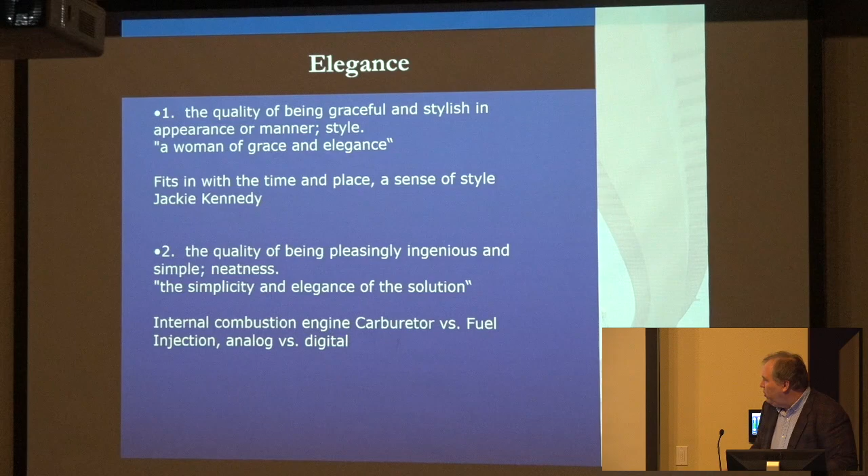That's why, of course, it exists now. We have a lot of computers and whatnot to run our cars, and it couldn't really exist back in the 20s, for instance, when they were looking for a way to mix fuel with the air in your system.

Bridge engineering. We're here to talk, and we'll use bridges as most of our examples today. This original talk was written to be presented to some bridge engineers to help inspire them and go forward. So some of that's going to creep in at this point, and I'm sure at a few times it probably doesn't fit exactly with what everyone does here, but we'll talk about it some anyway.

People build buildings, houses, courthouses, city hall, prisons, barns, you name it. Heavy civil, these are like water tanks, things along those lines. Roads, freeways, paths, highways, streets. We push dirt around quite a bit to try and make things work.

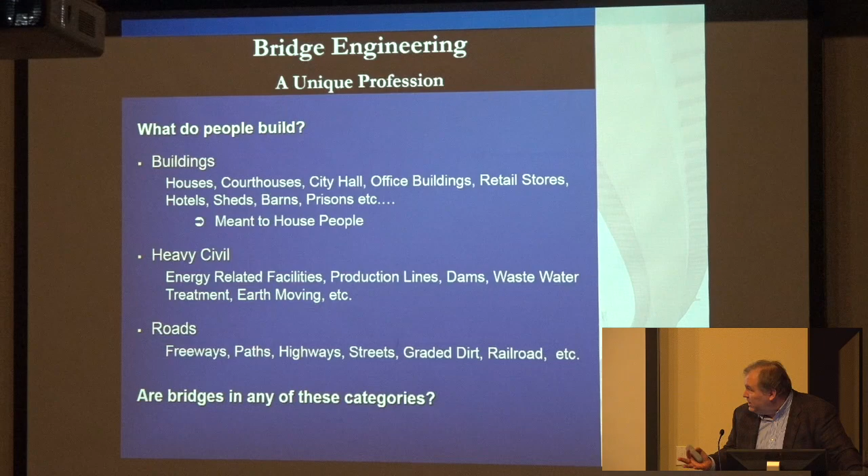And of course, are bridges any of these? I say no, they really aren't. Bridges are fairly unique in their form. They gather pieces and parts of all those. Obviously, in our case, highway bridges, they have a road going across them, so they're a little bit like a road. But they're kind of like a building too, in that they have structure, foundations, columns, beams, and things along those lines.

They are built very differently than roads. Roads are pushed dirt up, and then we pave them with asphalt, whereas a bridge is a structure that we build and then complete with a deck on top of it. It's very different from a building as well. Buildings have walls, shear walls, and other things in them, whereas a bridge really doesn't—it's columns supporting a deck up above it. They're really a very unique piece of work.

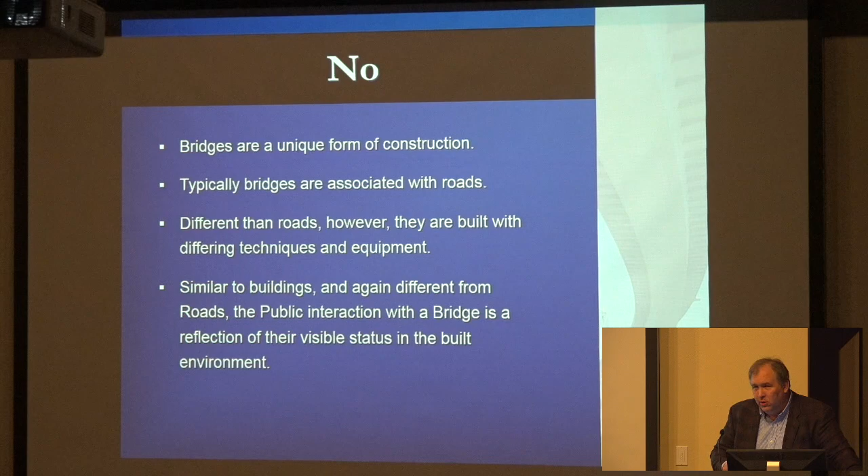One of the things that also makes them, I think, unique is that from a public structure standpoint, they have a very, very strong effect on any location where they're constructed, whether it be rural or in a city or things along those lines.

So I think it's a privilege to be a bridge designer. The expertise to design a bridge is unique. We have our own codes and whatnot that we follow.

To get a little bit misty-eyed or whatever, I guess you'd call it, bridges are the cathedral of the modern age. The reason I come to that statement is in medieval times, when you think of those great European cathedrals, the church was the economy. The church existed, and they employed people to build these big cathedrals, which is what they wanted. That was really a big part of what kept the flow of money going at that time. Governments were very haphazard, really didn't even exist in a lot of cases. But it was the church that really helped keep that economy rolling through some of the dark ages, the Middle Ages and whatnot.

I think bridges serve much of the same purpose at this day and age. They provide an economic engine for our society. A few years ago, we went through what was called the Oregon Transportation Investment Act number 3—there was 1, 2, and 3, and actually all were driven to the same sort of thing, although 3, I think, was the pinnacle. It was a large bonding fund that the state put out to get us through much of a downturn in the economy, pumped a lot of money into a lot of hands, and really helped keep the economy of Oregon moving when it was having some difficulties outside of the public sector.

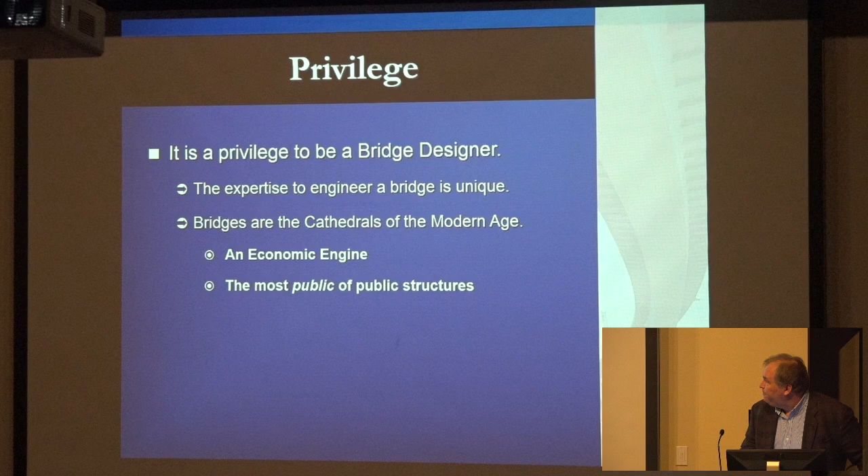Bridges still serve some of that purpose to this day.

So, aesthetics: a particular theory or concept of beauty or art, a particular taste or approach to what is pleasing to the senses, especially sight, although I think sound comes into play here some too, maybe not smell so much, certainly not taste.

Vitruvius wrote De Architectura, 10 volumes dedicated to Caesar Augustus. This is our first book that is any extensive work on architecture and what architecture means. He wrote it to Caesar Augustus, as in his glory, if you will. Vitruvius was essentially the second man in charge of Rome at that time, and he was Caesar's architect. He was his builder, his engineer, in charge of roads and bridges, and did a great job. He was really the very first guy who sat down and thought about just what it means to build things.

He defined 3 basic requirements of construction: utility or commodity, durability or firmness, and beauty or delight. So utility, durability, and beauty, he picked as the 3 things that you need to deliver in any kind of construction. Those are the 3 important things.

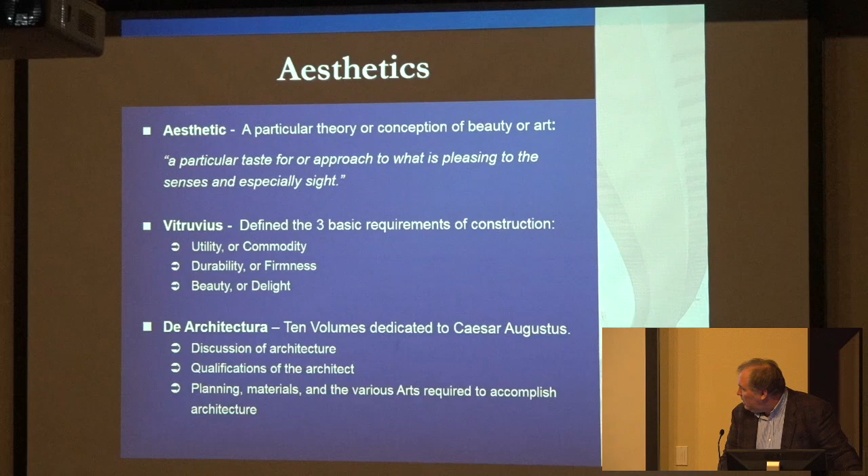So utility and durability — these are pretty easy to define, or at least imagine. Utility is whether the structure does what it's supposed to do. From the standpoint of highway bridges: does it provide a deck for us to drive our car from this side of the river to the other? Does it carry the pipe we want to carry? Does it deliver that piece of work for us?

Durability, of course, goes towards age — will it stay together? Concrete and steel are all very solid and give us great durability. Wood is actually a wonderful material, a little less durable, but we've still got plenty of wood bridges around. In fact, I've got a contract now that I'm just finishing up, or starting on, to replace a wood bridge out in Lincoln County that I'm looking forward to doing.

Right now, our code generally says that bridges should last 75 years. We generally like to think, particularly for our more major ones, that they'll go somewhat longer than that, and certainly they do — we've got a number reaching or exceeding 100 years old in the state now. In fact, we've got a few that date back to the 19th century, but not very many. Our real first push of building in the state was right around the 1920s, so we're getting right into that range now.

So beauty, our third thing that we need to have — what the heck is that? Of course, that's in the eye of the beholder to a large extent. But for us as engineers and designers, we kind of need to put a little bit more definition to that, because some of us engineers don't have particularly great eyes. Maybe some do, some better than others.

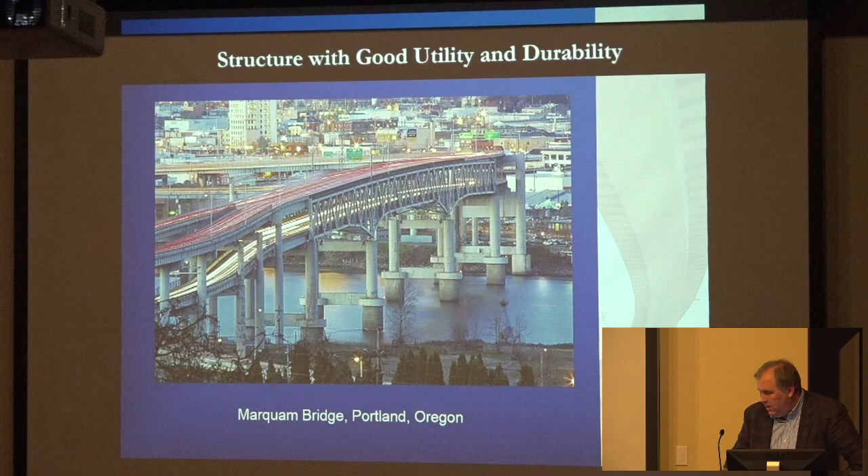I happen to think it's not a bad structure. It's certainly not beautiful by any great stretch, but it's certainly not a total eyesore, at least not in my mind. But when it was constructed, it resulted in some backlash from the Portland community. They didn't think this was quite the visual they wanted in the city, and really wanted to see something more in the next structure that went up.

And shortly thereafter, just a few years later, the Fremont Bridge was constructed, which is essentially the exact same bridge - 8 lanes of traffic, 4 on the top, 4 on the bottom. It goes across the Willamette River, about the same length, but certainly very different from a visual aspect, and quite a bit more attractive. This was the longest tied arch span in the world when it went up, so it was a very significant structure, and still is to this day.

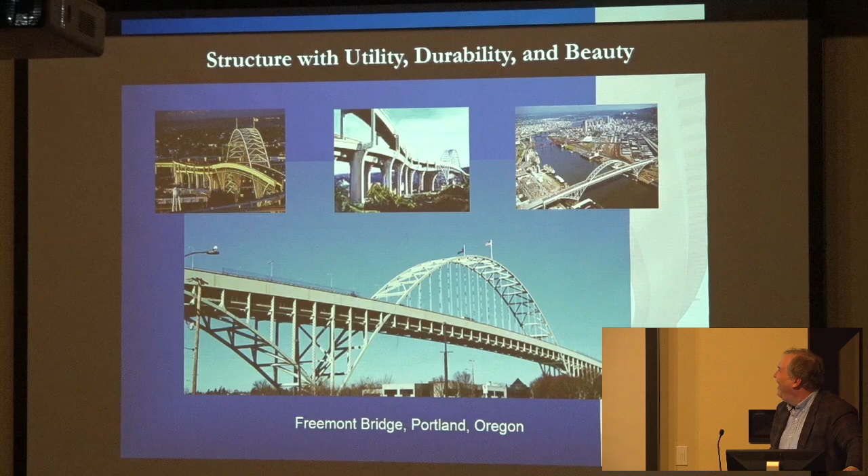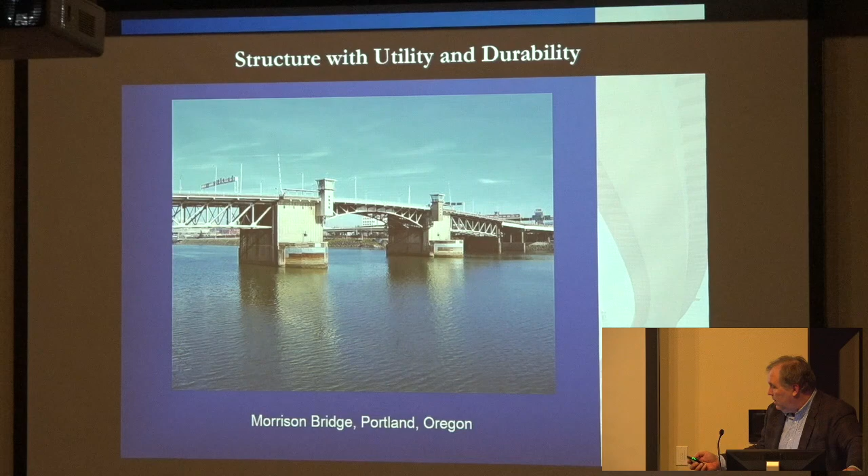And again, not unlike the Marquam and the Fremont, we have another example just downriver that really is essentially the exact same bridge, going over the same river. This structure was designed by the Lindenthal firm out of New York. Gustav Lindenthal did this bridge, the Ross Island Bridge, and the old Sellwood Bridge, all 3 of them at the same time for Multnomah County, designed them all as one package.

And generally speaking, just a little bit more satisfying form. The railing is more attractive, and it's just really a much more pleasing and inviting structure, I think.

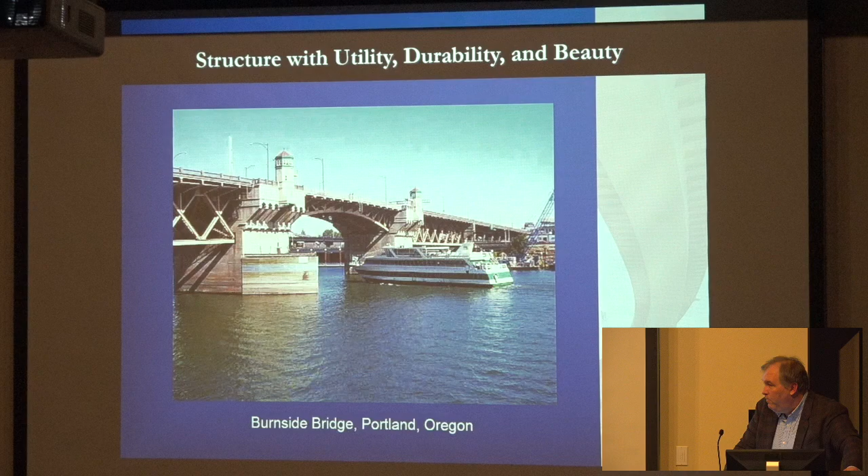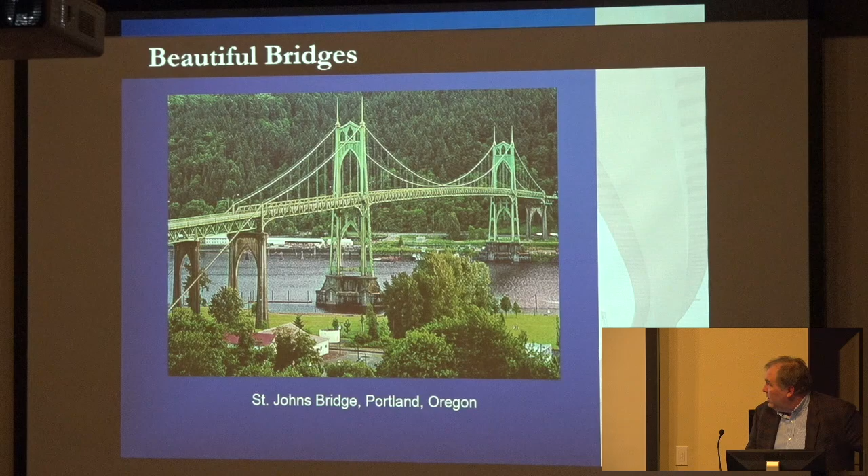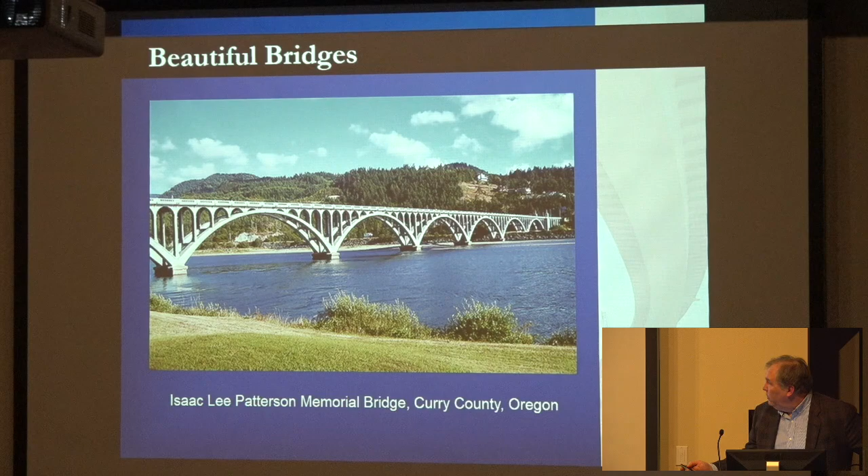And of course, it looks very much like the Sydney Harbour Bridge in Australia. Good architecture is original, and great architecture is stolen.

Again, a fantastic structure. If you go to Australia, they have walking tours—you can climb up on top of it. They have tours you can sign up for. You don't have to bribe anyone, I don't believe.

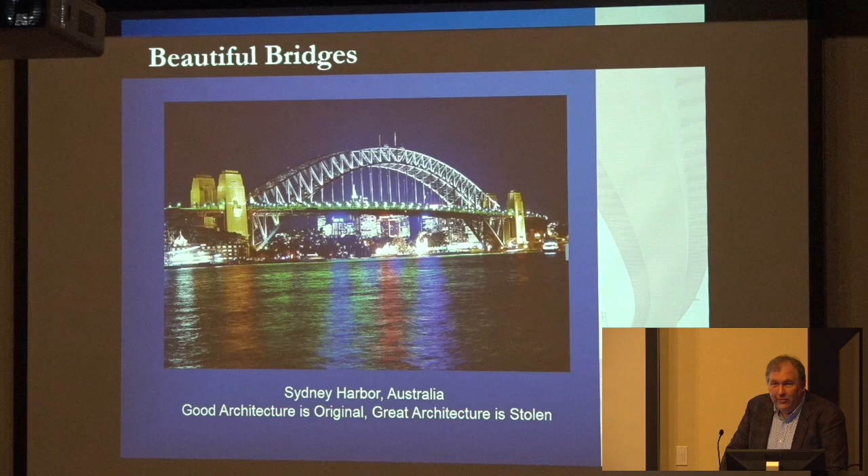In this case, he searched out ways to get himself busy. Joseph was very good at finding people to pay for work that he thought was a good thing to do. This is one that he did—he convinced Marin County and San Francisco County to fund a toll bridge.

It's still a toll bridge to this day, to build this fantastic structure. He did have to respond to the folks who had the money, and there are sketches—I haven't included them here—of what his original concept was, and I can tell you most people would use the word hideous, and I think that's probably kind. It's not an attractive structure at all.

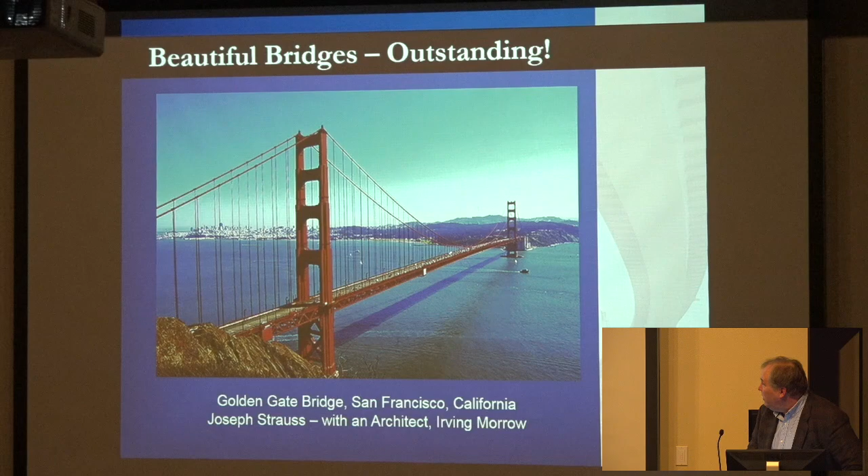We ended up with a very satisfying result at the site, and I'm certainly indebted to Irving, because when Joseph Strauss does a bridge without an architect, it comes out a little more utilitarian—certainly good utility and durability in that case, but from a beauty standpoint, I think it leaves something to be desired.

This is, again, here in Oregon—from Rainier going across the Columbia into Longview.

Again, structurally very sound, a very solid piece of design work, but visually just not something that you really want to put on the front page of your paper, I guess.

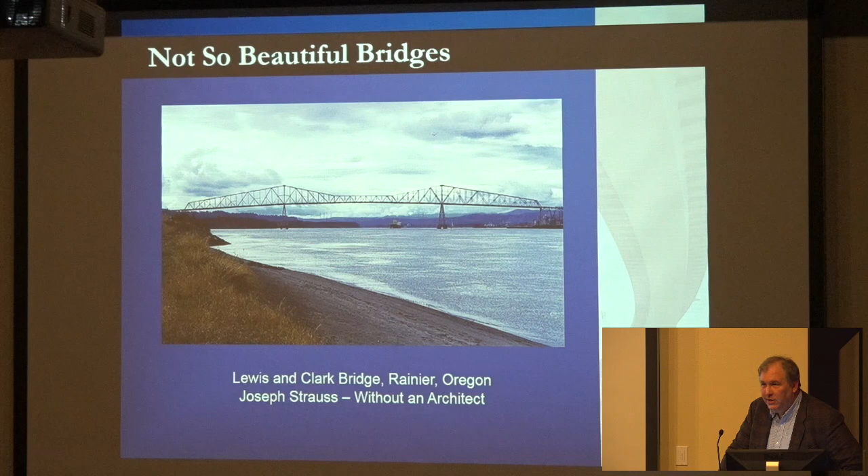So this is a cantilever truss design, which was a fairly dominant long-span bridge design for quite some time, through the first half of the 20th century, even probably moving into the 60s. We see a number of examples of this in Oregon.

This is a little bit better looking, we got some curve at the top chords. This is the Astoria Megler Bridge off of Astoria. This was designed by a fellow who worked for the Washington State Department of Transportation, and he came down on loan to the state of Oregon to help design this, and his name escapes me at the moment.

Interesting story with this bridge, and I've kind of always wondered what would have been here. There was a fellow that worked for Conde McCullough, kind of a right-hand man for him, by the name of Dexter Smith. Dexter and Conde both collaborated, and they wrote some textbooks and whatnot, one of them was on suspension bridge design. And to his credit, Dexter was something of an expert in that regard.

When the Tacoma Narrows Bridge collapsed, I don't know if you're familiar with the Tacoma Narrows Bridge collapse, from some vortex shedding and whatnot at that site, designed by the tremendous Leon Moisseiff, who was the engineer and main designer of that bridge. A brilliant man, but unfortunately he pushed his concepts and his luck a little bit too far on that bridge.

But Dexter Smith was on loan to the state of Washington then to redesign the bridge that's there today. They built the new bridge on the old foundations left after the bridge collapsed, and Dexter really did most of the design work. So it seems, I guess, turnaround is fair play, because then Washington loaned a guy down here to Oregon to design this bridge. The story goes, however, that Dexter at one point went in to Conde McCullough's successor.

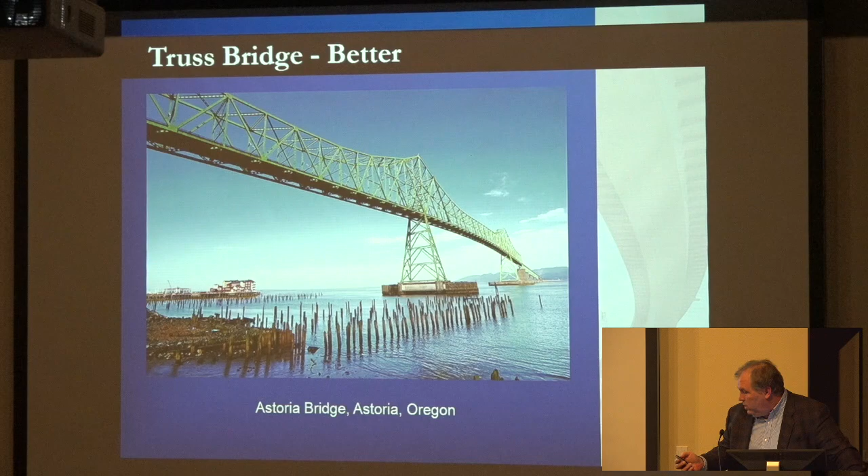Anyhow, it's a fairly satisfying bridge. Again, it's got a lot of aspects to it that make it fairly utilitarian, though, and still keep it from being what one would call a really beautiful structure.

Then you look at the Coos Bay Bridge, the McCullough Memorial Bridge in Coos Bay. Again, the same structural form, cantilever, suspended cantilever truss bridge, a long span structure. McCullough attacks this with both curving top and bottom chords on the structure, tying in very nicely with a series of deck arches approaching from the north end, and really quite a satisfying bridge.

Some more detail and interest in the piers rather than the steel A-frames that we saw on the other two bridges. Really a very nice, pretty nice structure.

This is one of only three bridges in the entire United States that are named for their designer, the McCullough Bridge. The others are the Roebling Bridge, which I think is in Cincinnati, Ohio, and the Eads Bridge, which goes across the Mississippi at St. Louis.

So McCullough really had a great impression, like I say, ultimately. I guess if that's how you rate your bridge engineers, he's one of the top three.

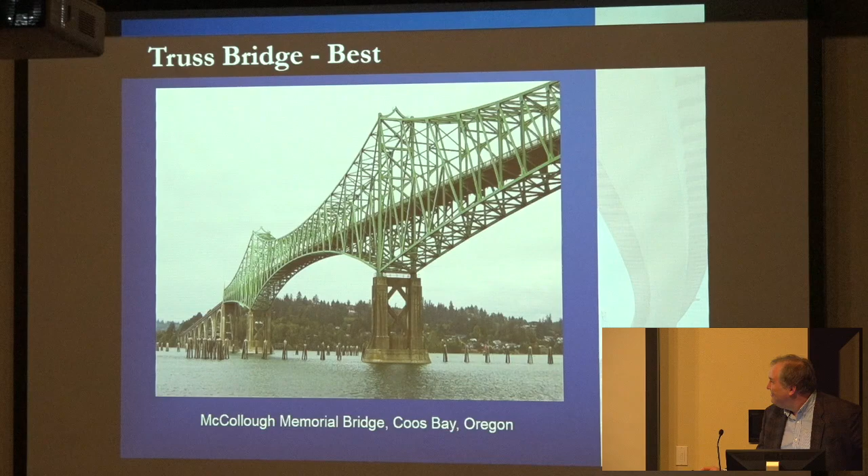It doesn't necessarily need to be an extremely large bridge. This is one that I did early in my career, up at Gates, Oregon. This isn't on the highway, it's a county bridge owned by Marion County. It crosses into Linn County, which I think paid for part of it too. But I think it was fairly satisfying.

One of the things this bridge had was, again, I kind of went back to some of the forms, a little bit of the Gothic arch form here. One of the items there that somebody told me, just as I was getting into this, was a fellow named Sam Grossberg who had forms like that he put in columns only about 1.5 inches deep, and he said you can't see them at all, you got to get crazy. So I really dug these in, about a foot deep, so they make for a nice impression with the taper. Wanted to emphasize the horizontal lines.

I wanted to keep this as thin as possible, and that's why the columns slant in. It reduces the span length and keeps the superstructure thinner at the site. I think it reacts nicely to the site, stepping down across the rocks and working its way through the section. Received a number of awards for that, and I was very pleased with the result.

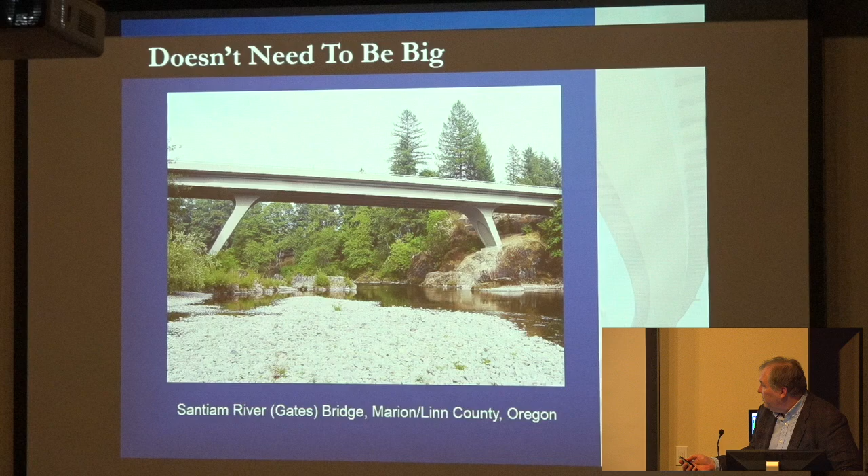Thematic elements - this is kind of an interesting discussion in terms of items that make things. We establish an aesthetic for these structures.

This is the Bend Parkway in Bend. This is the Sisters Loop Ramp, at the very north end. This is US 20, I think, it goes across here and heads over to Sisters and on up over the top of the mountains. You come down this way - that's the off ramp right there. Then it makes a loop around and goes across the bridge this direction.

Early on in the Bend Parkway development, there was a plan to do an aesthetic development for that entire section. Some of the items chosen were things like using cinder asphalt for all of the bike lanes on the project. Those have long since been paved over and they're all nice and black now, just like anywhere else. But that was the original concept and was used.

But all the bridges were meant to be single span concrete structures with this haunched form crossing. I had the luck of getting this one, which is the longest one of the bunch, and it ended up having to be a rigid frame structure, which makes this, I believe, the longest rigid frame concrete structure like this in at least North America.

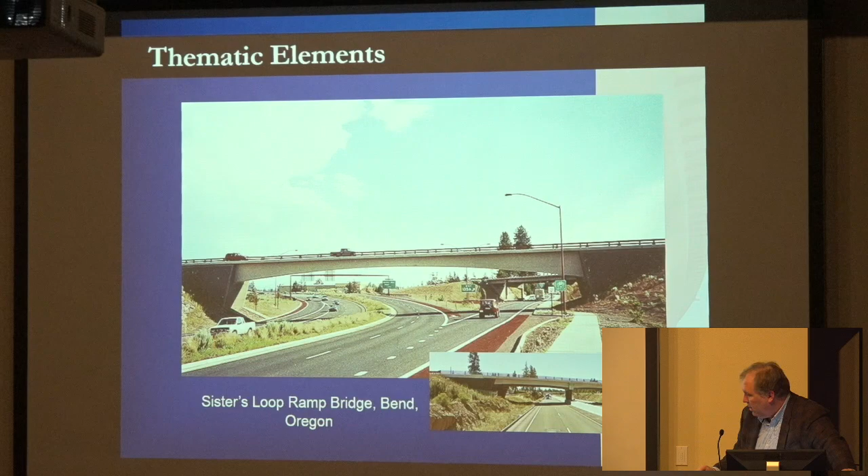Some ornamentation - these are things that bridge engineers kind of rail against a little bit anymore. They want to avoid some ornamentation. They think that the bridge should really stand on its own. I happen to think some ornamentation is okay.

This was actually rehabilitation - the A Canal Bridge, Klamath Falls, on Esplanade Street. We retrofitted it with what's called the Texas rail, an open rail with balusters on it, and these nice posts at regular intervals. I think it really helps enhance the urban nature of this - this is actually pretty urban. You can't tell with all the trees along the canal, but Alameda Street's right over here with a bunch of houses on the other side, and the high school is just kind of right behind where we're standing looking at this structure.

Doesn't need to be in Oregon.

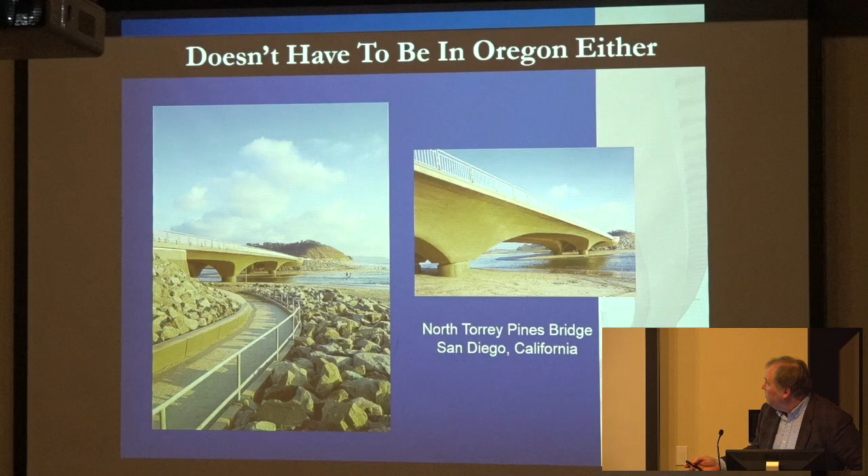So, are you ready? This is kind of stuff that's more directed towards some bridge engineers, but certainly anybody that wants to jump in, feel free.

We all want to produce beautiful, or at least good-looking bridges, and I think we want to do that for our community. I think recently, unfortunately, or at least unfortunate from my perspective, the third bridge seems to have died on the table here in Salem.

I think there were a couple of things that were kind of interesting about that. I do think one of them was the renderings weren't all that great. So, a little bit more beauty in the renderings might have helped a little bit.

But we'll never know. And I do think that from a community aspect, it's important to get out and make the point that this is going to be something you're going to live with for the next, who knows, 100 years plus, maybe even 200 odd years, or maybe more. As a result, you really don't want something that's disposable. You really want something that's an enhancement to your community.

So is it important? Certainly it is. I think that's a given. Can beauty be quantified? Now that's kind of a tough question, and we'll talk about that for a second. And what do we need to know to quantify that? And then can anybody do it? That's a good question, of course.

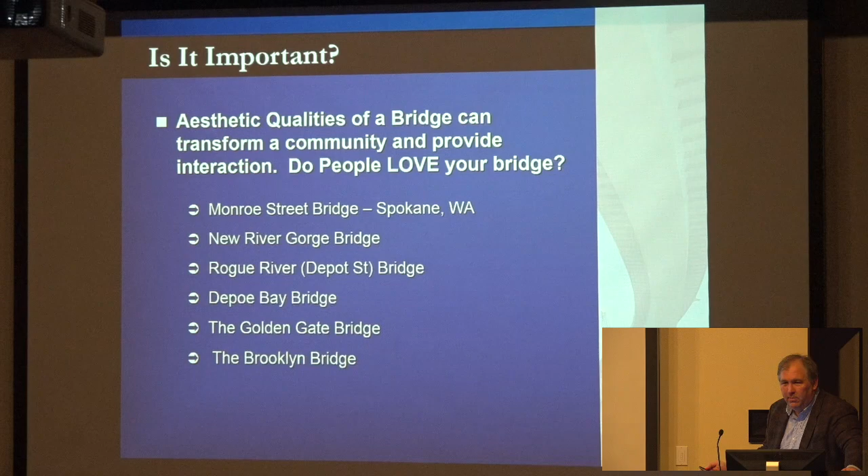The city of Spokane—this is the Monroe Street Bridge in Spokane. It's a project I was pleased to have an opportunity to work on for a rehabilitation. The project really took off all the stuff above the arches, all the way back, and rebuilt all that stuff, the deck and the spandrel columns and everything. The only thing that was left was really the arches and these tall towers.

This bridge was kind of interesting because it was built in 1910, prior to our modern understanding of reinforced concrete. So it's basically a plain concrete bridge, a huge chunk of concrete poured into shape. Pretty impressive - easily the most massive bridge I've ever been next to in my life. It really is massive, and it had an architect on it as well.

The railing on this is a very interesting form, and it's a chain form to connect the north part of Spokane with the south part of Spokane across the river to suggest that. The little houses on here, the troll houses, are meant to reflect a Conestoga wagon shape.

On the sides of this, and this is really unusual, they have actually a cast concrete bovine skull on the side of these with horns and whatnot. That's kind of one of my main contributions - they were falling apart, and I wrote the specification and worked up how to copy those and make new ones for the rehabilitation. The city of Spokane uses it on their logo, so certainly a defining part of their community. They see it as such.

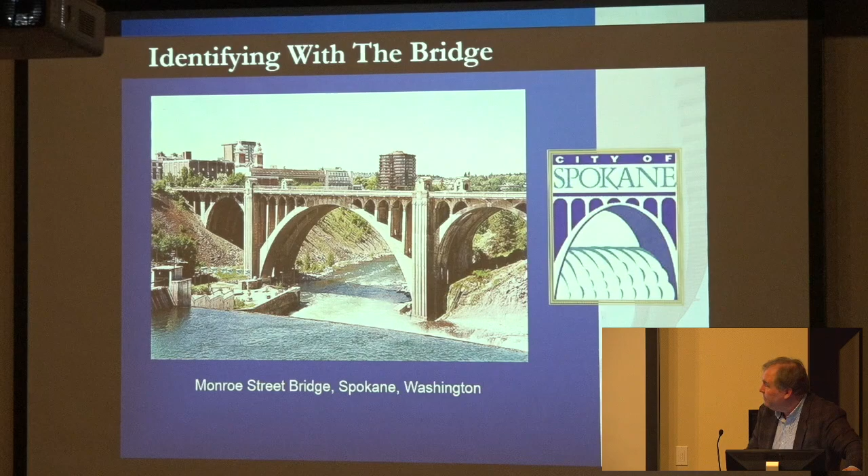New River Gorge Bridge in West Virginia. They thought enough of it to put it on the back of their quarter - again, a defining piece of civil work for West Virginia. Lovely structure, nice, light, tall. I kind of criticize some bridges for being maybe a little too light and feeling a little bit too spindly, but I don't find that to be the case here at all. I find this bridge to be very light and treads nice and lightly across the gorge below. Certainly a very satisfying photograph of a lovely structure.

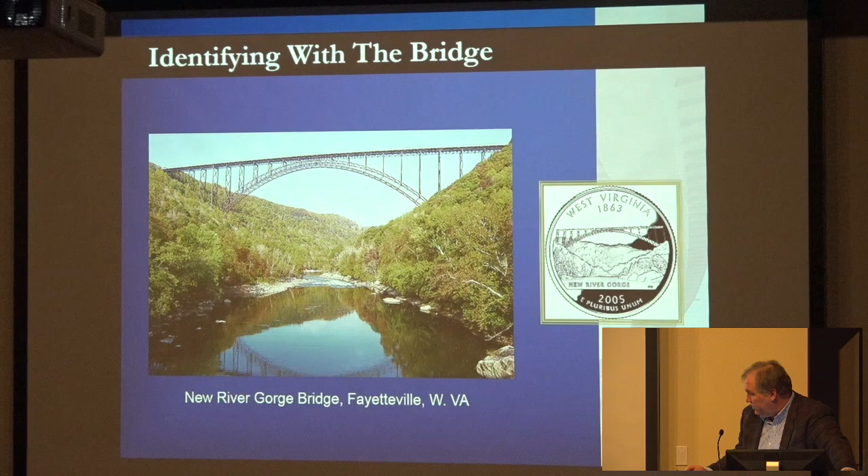This is a bridge in Rogue River, Oregon. We'll look at this one 2 or 3 times. This is one that I did, and I'd really like to put my own stuff up mostly because I don't want to criticize other people's work too much. And I will say there are things to criticize about this.

But the goal of this structure was - there's a lot going on here. There's a boat ramp right underneath the bridge with spaces to park your boat. It connects across the Rogue River. This is Interstate 5 in the background - you can see this if you're driving down the interstate, you can certainly see it off to the side. But then it connects underneath the Interstate 5 interchange to what is basically the downtown area of Rogue River, just on the other side of the interstate, and then connects it across the river to the other side and to the park that's above. So very much a situation where you're going to have individuals on foot interacting with your structure, both crossing the bridge across the top, but also walking down in this area down here.

I really wanted to concentrate heavily on this - there's another trail on the other side too, a river trail that cuts down and goes underneath this side and continues up the riverbank on that side. So all aspects of this bridge are really very open to people on foot to get very close to, and I really wanted to emphasize that. So I spent quite a bit of time thinking about how I want to present this with interaction of people who are at a very human scale and how they fit with this structure. And I came up with a number of different things.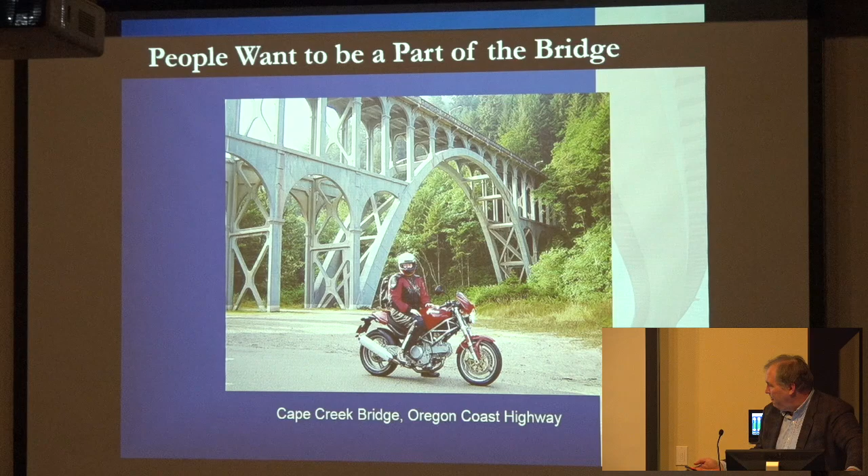Quantifying beauty: arbitrary means are used, subjective, public survey to produce a score. Things like public outreach—what do you folks think? Let's put different ideas out there, and we'll put stickers on them or something like that and see who votes on what.

Cost—sometimes there's an aesthetic budget; we want to put some money to these things. As for design, I don't think aesthetics is particularly expensive. Look at the Sellwood Bridge in Portland that we just completed not too long ago. It's really hard to put a number on how much money went into aesthetics there, but it wasn't a large amount. In the context of the overall job, around $350 million, the actual money that went to the bridge itself for aesthetics was probably, if it was 10 million, I'd be surprised. So from a percentage standpoint in these larger projects, it's really quite small.

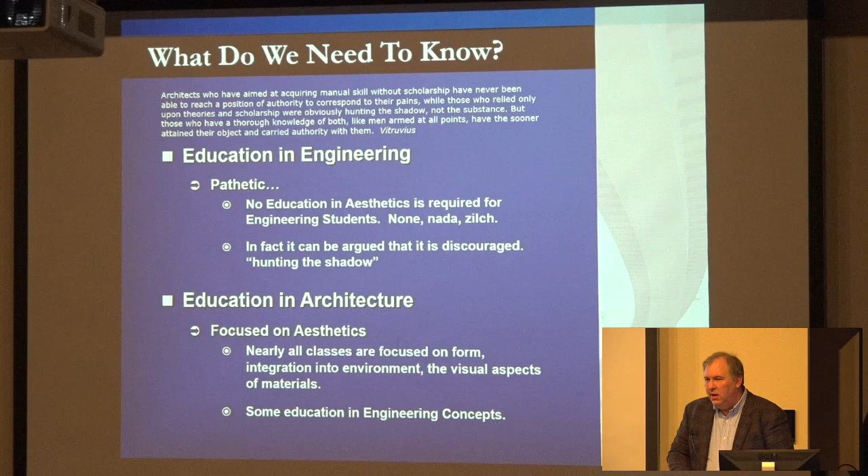With the Industrial Revolution, again in the 19th century, we had a number of new materials that came on board. Prior to that point in time, you had the concept of the master builder - he was the architect and the engineer, really all rolled into one. And when we had more materials come on board, steel, reinforced concrete, and more expertise required to understand those materials, we saw the divergence. Now we have the engineer, we also have the architect, and they work as two different individuals at this point in time. That divergence has led then to the engineer being very specialized, and the architect really taking on that piece of work for the visual aspects.

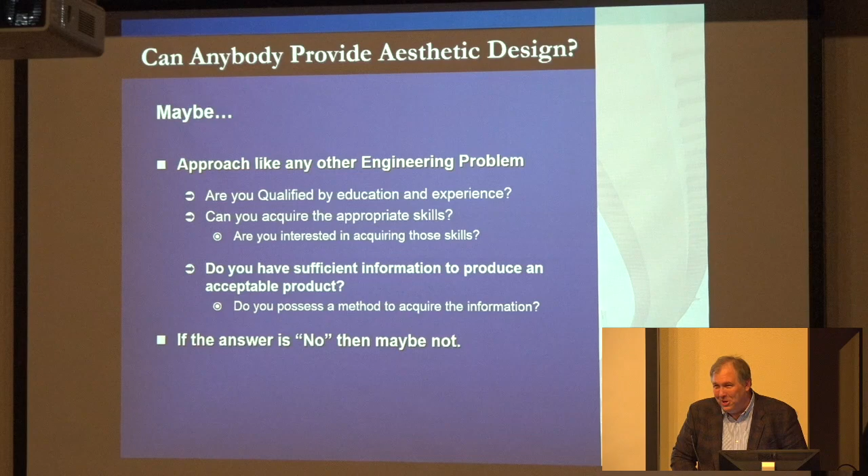Can anybody provide aesthetic design? Maybe. Approach it like any other engineering problem. Again, this is directed towards those bridge engineers trying to get them - if you can't answer these questions, well, maybe you probably shouldn't try. Stick with running your calculations, and that's good, because there's plenty of good work out there for engineers that can run calculations and do the analysis and whatnot.

Is it important? Of course it's important. I think beauty can be quantified qualitatively. We can certainly look at a multiple set of groups and say, I like this one better than that one, I like this one better than that one - kind of like being at the eye doctor, is it better, worse, better, worse? And you kind of work your way through till you finally get to the top.

What do we need to know? Educate yourselves. Again, going back to Vitruvius, there's a certain amount of scholarship you want to do. You can do that through simple things like coffee table books. Texts generally have some information for those things as well. And can anybody do it? If the individual desires to achieve that scholarship of the work, I think that's very much a doable thing. So, some education.

Setting and environment, function, form which follows - form follows function, right, we'll talk about that. Line and shadow, which I think is probably the most important thing that comes into play, particularly for bridges, because bridges are a horizontal construction as opposed to vertical like a building. As a result, the aspects of shadow have a great effect on the way they look. Balance, I think, is extremely important. With modern architecture and modern materials, we're able to divorce ourselves from balance some and give some dissonance to our structures, which can be very attractive and interesting. But overall, from a classic sense, balance is a very important thing. And then economics - we need to keep our eyes on the bottom line.

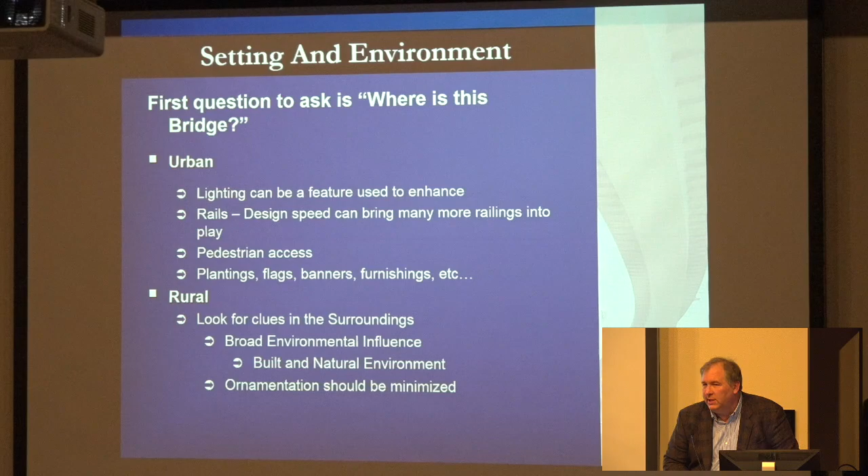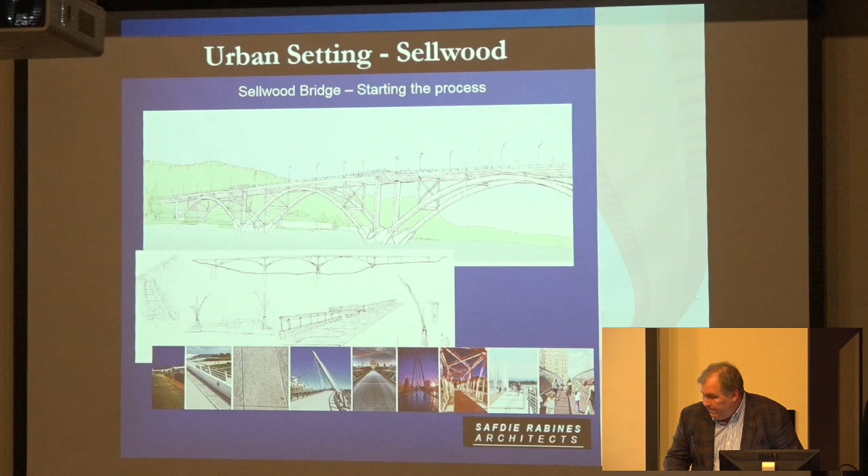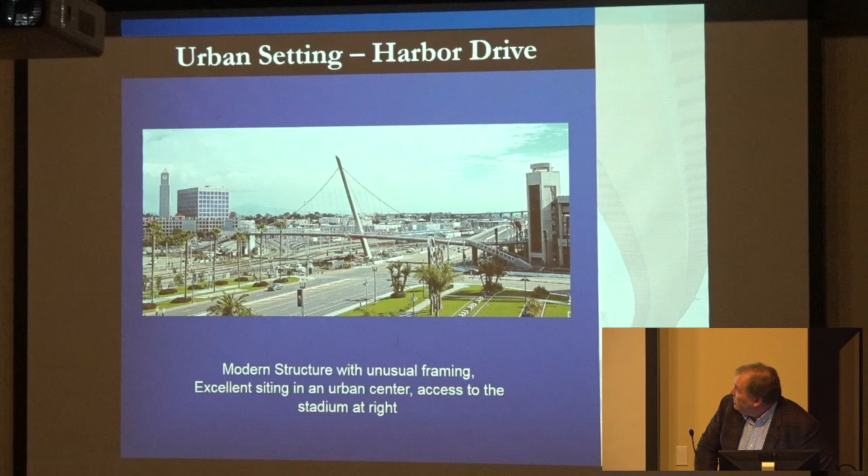The guy who was the reviewer on that job kind of gave me a hard time, because this bridge is what we call post-tension, and it's post-tension both directions, kind of upside down, backwards and left, right, forward and back. The fellow who was the reviewer on this said, 'So you're going to post-tension that bench too?' So I said no.

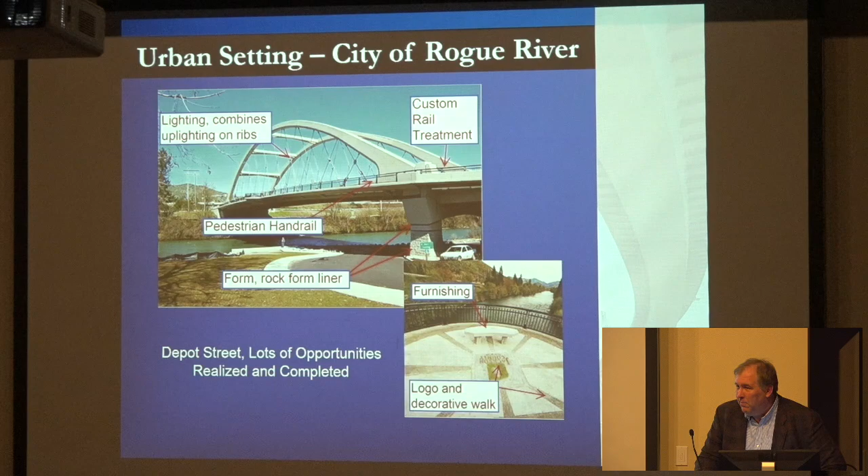The form liner where it's pointing, there's some black tiling on that. Actually, that's another idea that I lifted from McCullough, north of there at Roseburg, Winchester Bridge, where there are some red tiles set into the structure that I found very attractive. I pulled that forward and used those to give some black accent lines on this structure. Again, very inexpensive from an architectural standpoint—putting in a few tiles costs maybe a few hundred dollars in the structure as opposed to just plain concrete. But I think it's very much worthwhile here since that's a very public area.

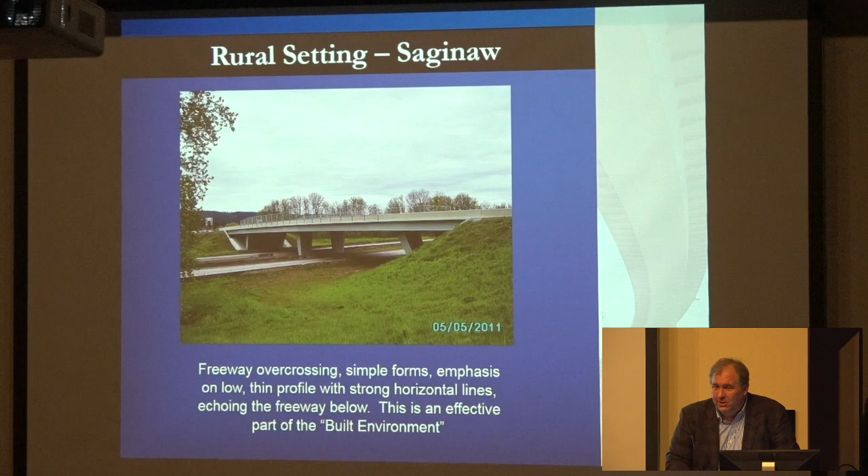This bridge is an interesting one—this is in Redding, California, the Sundial Bridge. I don't know if anybody's been down to see this or not. This is done by an internationally famous designer, architect, and bridge designer, Santiago Calatrava, a Spanish gentleman. I do think context is a bit of an issue for this—certainly it suggests a much more urban environment to me. And while it is basically in an urban park setting inside Redding, I do have a little bit of an issue with just the very modernist piece of work set in a natural setting. But certainly it's dramatic and a tremendous piece of work.

The interesting story behind this one is that it was built by a company called Skanska. If you're up around Portland, you'll see their signs up—they're a very large international contractor. I worked with them on a project for BART here a few years ago, and some of the guys on my project had been working on building this bridge up in Redding. One of the things we do whenever we build a bridge is the contractor redraws all of our plans into working plans and hands them back to us. Then we review them against our design and put a stamp on them that says it's approved, approved as noted, or we note a few things, or we reject it—sometimes that's always fun. But on this one, with Calatrava as the engineer, they don't use 'reviewed' or 'approved as noted.' They send back a stamp that says 'your submittal is one with the bridge.'

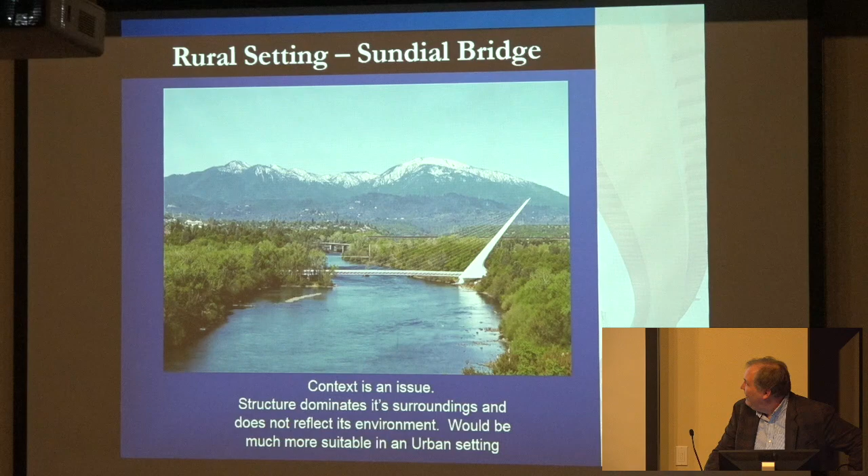My understanding of 'form follows function'—this is certainly a term that's been kicked around, accredited to Louis Sullivan, the father of modern architecture. The more exact quote is 'form ever follows function,' if that makes any difference to you, but I thought it was worth putting here. Many have interpreted this to emphasize a real focus on raw structural form and to eschew ornamentation, and I tend to disagree with that conclusion. I mentioned ornamentation earlier—while I think that's part of where it's going, I don't think that's really the case. In some of the 19th century—again, a dominant architectural style—this is Beaux Arts, the Academy of Music in Paris. And the basic question is, so where's the front door?

You come to this, and how do I get into this building? Is its form suggesting its function to you? Certainly a dramatic piece of work without a doubt, sculpturally quite exciting and beautiful. But functionally, it probably has some things that need to be considered.

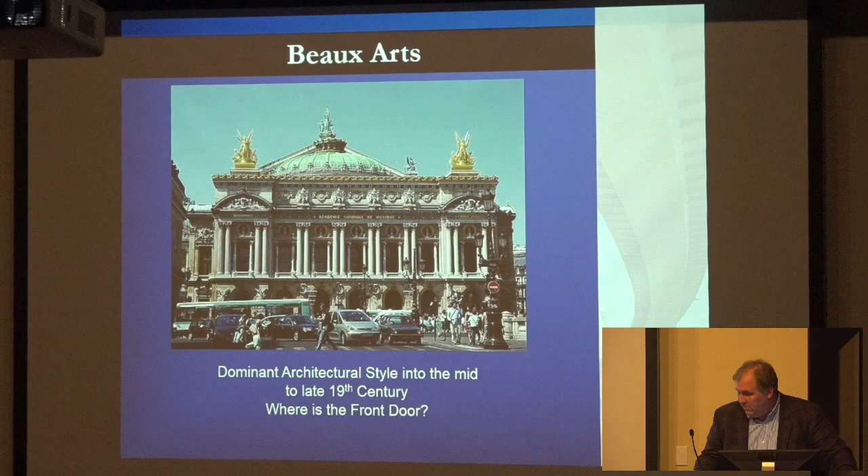Louis Sullivan, this is a bank in the Midwest. You want to know how to get into this bank? Well, the door is very obvious, where you want to walk in the front on this. But still, quite a bit of ornamentation. I think it's an interesting structure, and I would love to go inside of it. I think its interior is probably great.

I'm really very disheartened that they tore down the old First Bank building here in Salem. In case you'd ever been inside of that building, from a modern architecture standpoint, in this context, it was really one of the most interesting buildings in the entire city. It's really too bad it was never able to find a new life as something else, but it's gone now, and that's what happens.

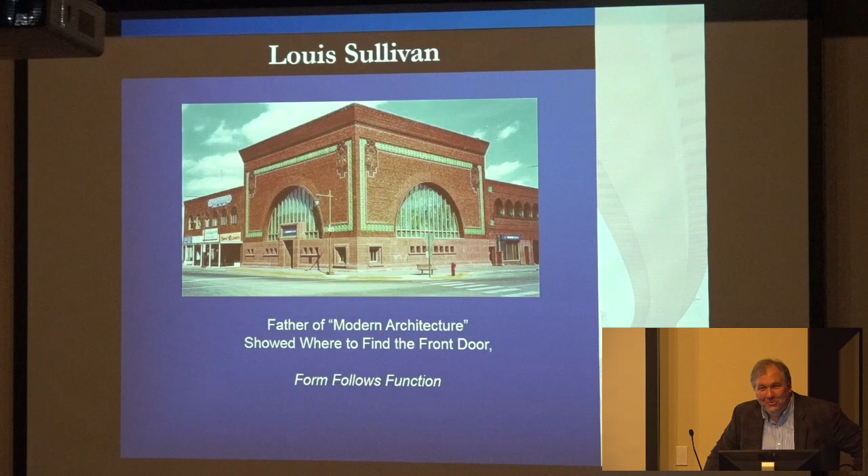So, function. Highway bridge function is, of course, the obvious: carry highway traffic across.

This is the Hoover Dam bypass bridge, a dramatic structure to say the least. I haven't yet been down to see it, but it's certainly on my bucket list to take a trip and visit it. It's interesting in that it was actually designed by the same fellow who did the Crooked River Gorge High Bridge at Terrebonne, using the same construction techniques. The Crooked River Gorge Bridge provided the background, the first step, and this is kind of the more dramatic, bigger piece of the same work. It's interesting to see how engineers work that way and go forward.

Conde-McCullough did that quite a bit too. You can see his tied arch bridges along the coast. It's very fascinating to look at them from an engineering standpoint, because the first one he did is designed internally quite differently than the last one. He didn't just come up with it and decide that's the great way to do it, he was refining. They're all quite different in terms of how he put them together, because he was always working to improve himself, even though externally they look very much the same.

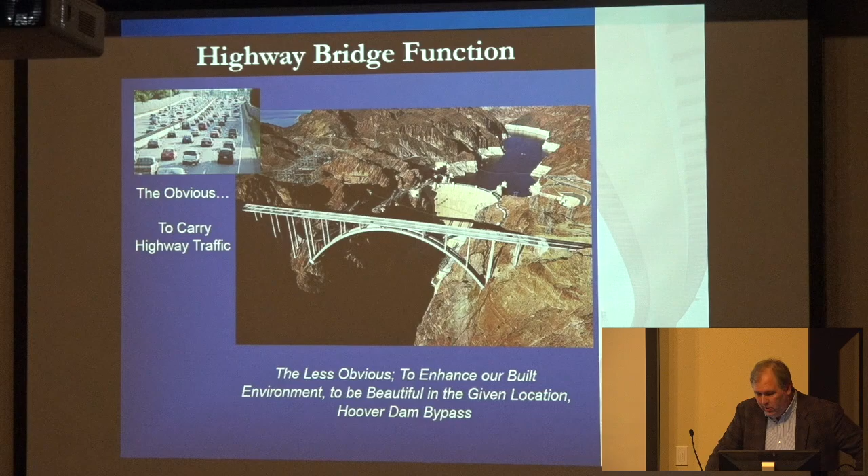But anyway, this is to enhance our built environment, beautify a given location: the Hoover Dam bypass, and again the bridge at Terrebonne. I think this is an interesting one in that the forms here are very simple, very rectangular. Again, it does eschew ornamentation, but that's not something you can walk away from and say is a bad idea. This worked out very nicely. I think the choice of the red color there was fairly inspired as well. A very good piece of work, a very attractive structure.

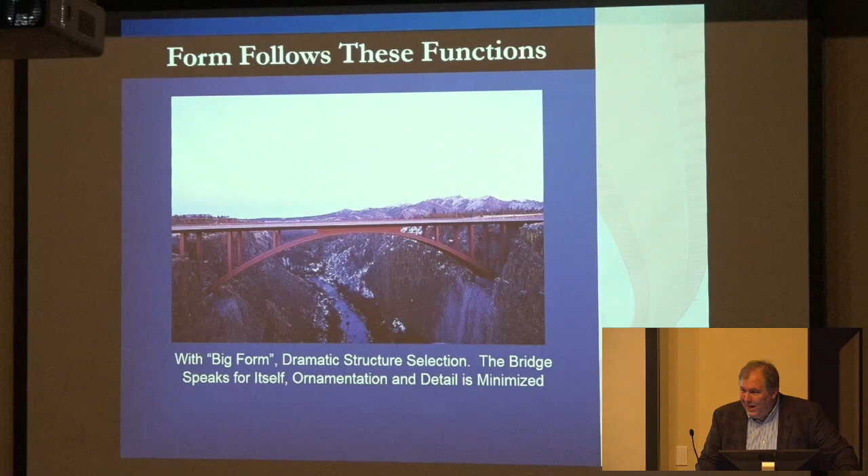I also think it's interesting that it sits in this group of three structures: the original Modjeski and Masters railroad bridge to one side, the Conde-McCullough truss arch that's now closed, and then this bridge, which is the more modern interpretation of the same thing. All of them have that arch form looking forward, showing an excellent collection of how engineers and designers think of things throughout the ages.

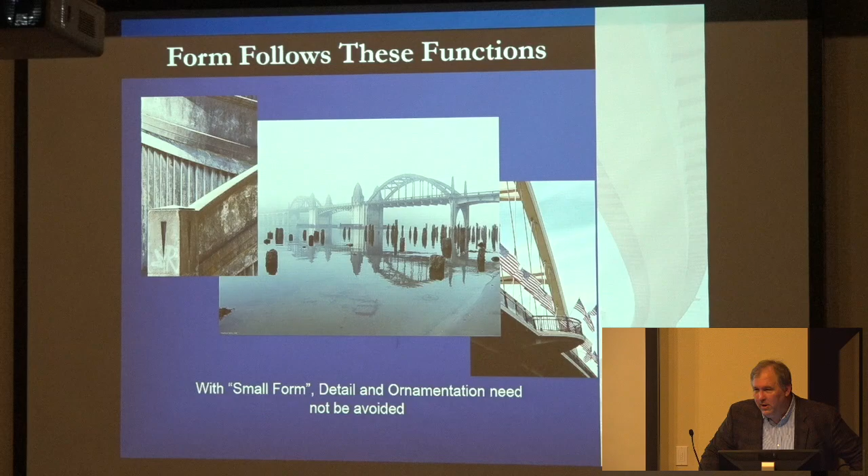Form follows these functions. Here, down in the corner, there's that Rogue River bridge with flags on it. There are small form details. The staircase on the left side there is on the Yaquina Bay Bridge, at the north end of that structure. There's a lovely piece of detailing of that staircase that comes down off the bridge. Very small form items, again, very much at a human scale, things meant for individuals to be part of and really next to.

Lines should strengthen and reflect the intent. Horizontal lines should be horizontal, and vertical lines should be vertical. There are exceptions; they should follow grade with retaining walls.

This is one that Leif Hogenstad taught me some years ago. I did a retaining wall and gave it to Leif, and as Leif being Leif, he was checking it for me. I was young, I don't know if I was even a professional engineer yet, and I designed this retaining wall and gave it to him. He gave it back to me two or three days later and said, 'Here, I fixed it for you,' and he redesigned the whole thing. He said, 'You want to do this and this and this because it looks way better.' So thanks, Leif. A wonderful engineer, extremely productive, who did a tremendous number of bridges here for the state of Oregon, who unfortunately is no longer with us.

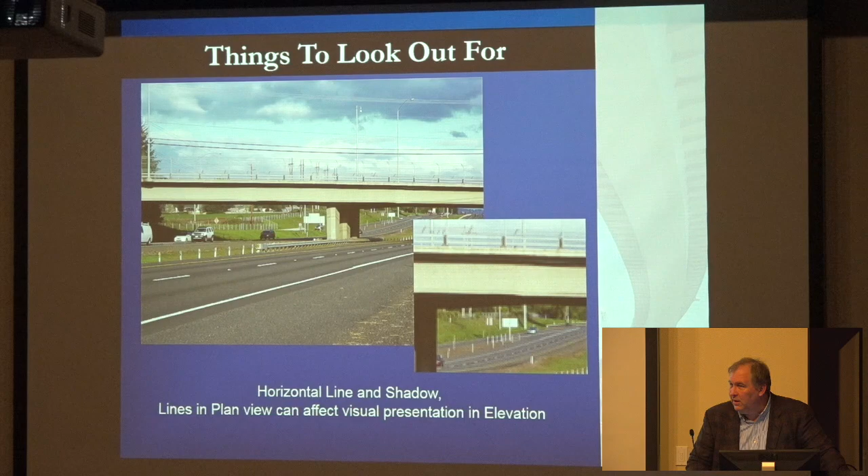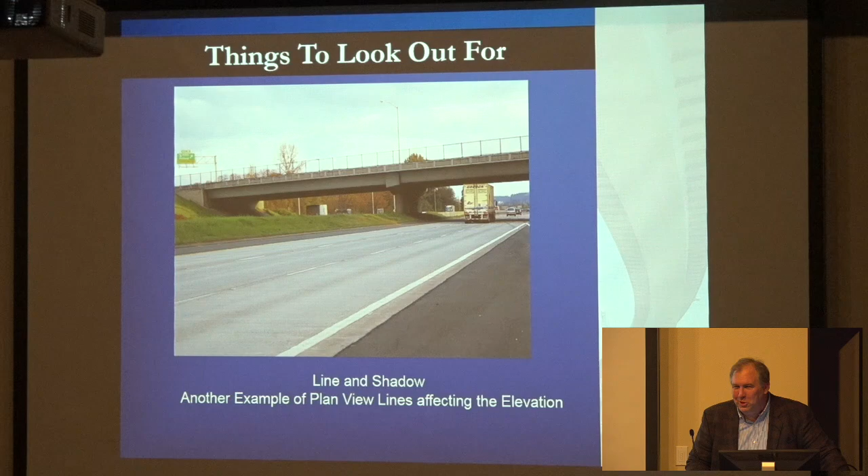You can get yourself into an interesting compound miter. This is right here in Salem, on Highway 22, and it's just the natural result of the flare on the bottom of this support coming up, combined with the fact that it's a skewed angle across the top. So you end up with this kind of odd line there. There's nothing wrong with it, that's just the way it works out, but it isn't very attractive. It's not very satisfying. It certainly invites the question of, so what went wrong here?

Retaining wall, again, this is one that has just chorded points between a lot of spots. One of the difficulties of doing retaining walls is the temptation to follow the ground line behind them and put in a line for everything that you can find that varies. Ultimately you really want to just have things that are nice and smooth, put curves in, and minimize the number of moves in those things.

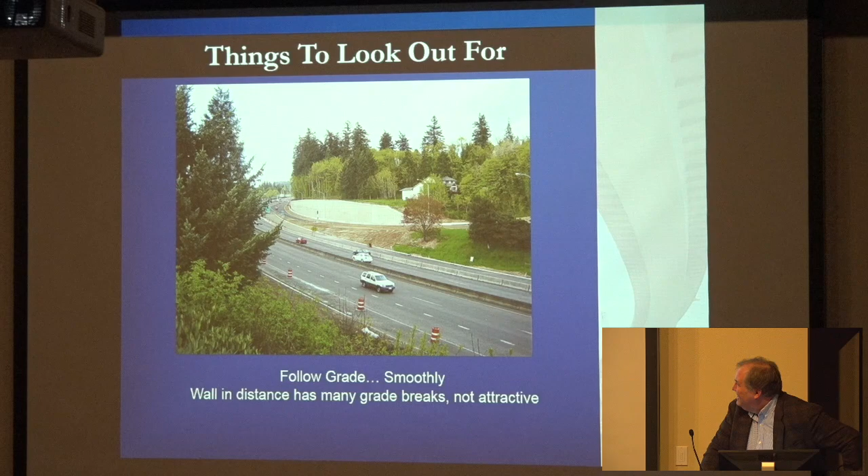I don't have a photograph of it here now, but the Iowa Street wall that's along Interstate 5 in Portland, they constructed it about 5 years ago, is really an unfortunate result. And I have talked to the guy who designed it, and he says, yeah, I told them that wasn't the right way to do it. But even still, fortunately, they've gotten into planting a lot of vines that cover these things up. So these do get covered up over time, and they aren't quite so difficult to look at.

Mass balance. This goes back really to the classic form, in Roman times, Vitruvius's times. It's interesting how engineering evolves over time. Here we are standing at the 50th anniversary of the landing on the moon, right? I cannot imagine being on the engineering team to do the moon landing with the technology available to us in 1969. The challenge must have been just beyond daunting.

It boggles my mind. The interesting thing is I look back further too, at Roman times. The Romans had trigonometry. They didn't have algebra, they certainly didn't have calculus, certainly no computers or things along those lines. And yet they built some tremendous structures. The Pont du Gard in France is an amazing piece of work. The Colosseum, the Pantheon, which is a domed roof that is still amongst some of the largest dome roofs in the entire world, a tremendous piece of work. How did they do this?

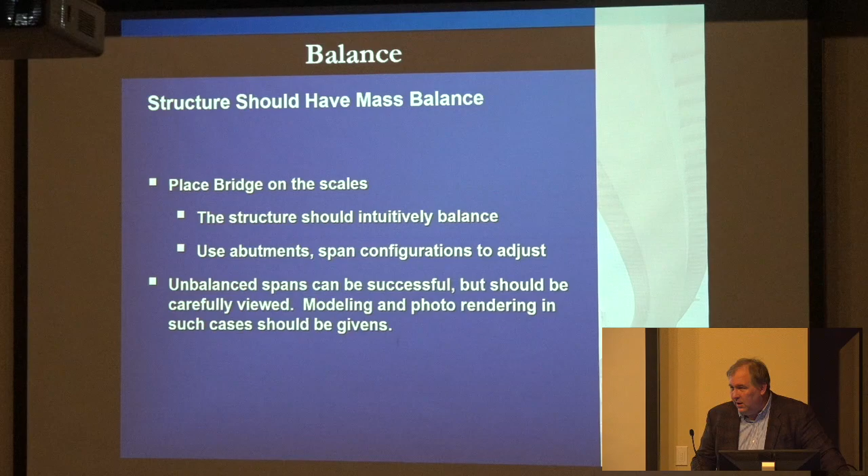And the answer is, I think, balance. It was a matter of sense of balance that they used very much in their engineering, or in what we would call engineering, in the design work that they did, and looked for that balance in their structures. And that's what really gives them, and makes them look nice too. That's one of the things that makes them, I think, very attractive - they are very well balanced. Unbalanced structures aren't very attractive.

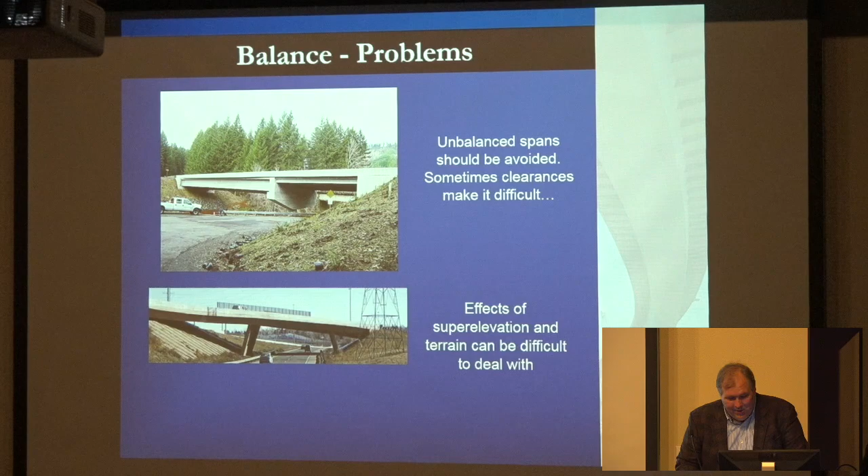Sometimes you can't avoid it. That's the Siuslaw River Bridge on 126 west of Eugene, but we had to get a road underneath there, so we had to put a shallow span across there. Not very attractive, but ultimately the only real solution available to us. The super elevation effects down in the lower picture give a very strange feeling to that structure. I think maybe that structure might have worked better with vertical columns in that case. But they can really catch things out and can be difficult to deal with.

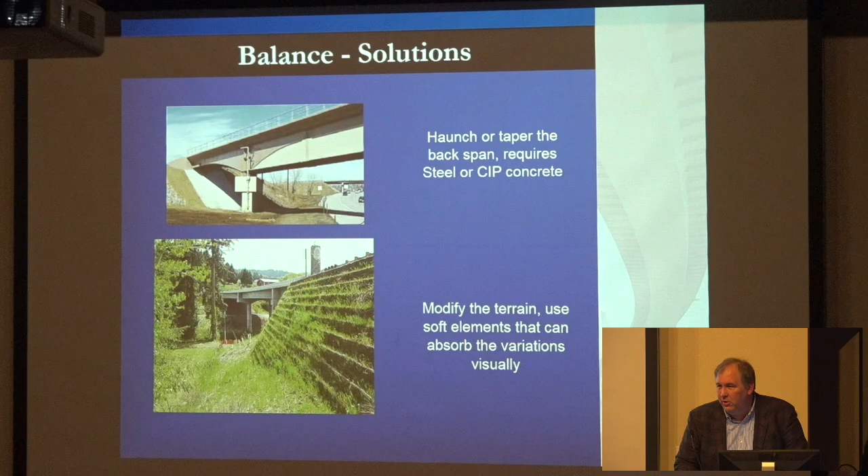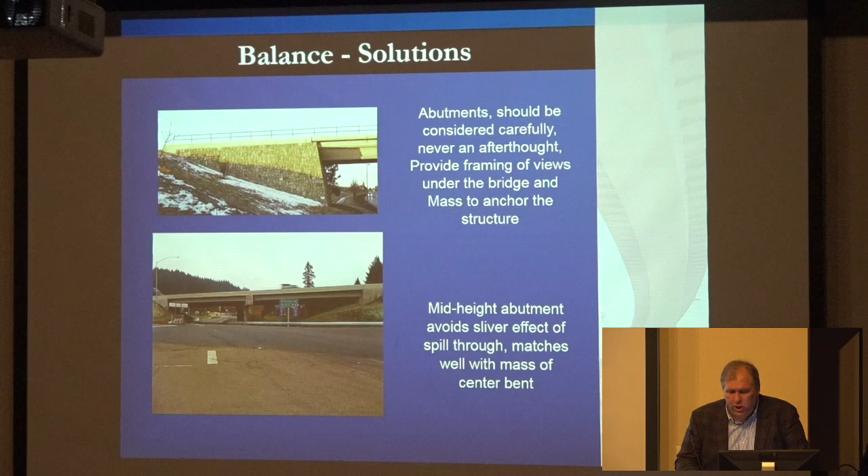Does aesthetics cost more to achieve? No and yes, or yes and no. No, I think following the basic principles should result in minimal, if any, cost increase. Items to consider are some trade-offs: steel, post-tension structures, offset by savings elsewhere in the project.

We used that Saginaw Interchange bridge that we showed earlier. One of the reasons that bridge is shaped the way it is, is because it's been made to be as shallow a structure as possible. The more I built up the interchange there, the more we were impacting wetlands off either end of the structure, so we got into needing to do a lot of mitigation for those, which is quite expensive. That's a post-tension structure, which kept it very shallow.

Tall abutments mean shorter spans. Lining on the structure costs absolutely nothing extra to keep your line. Make sure you're paying attention to your shadow lines—there's no cost to that.

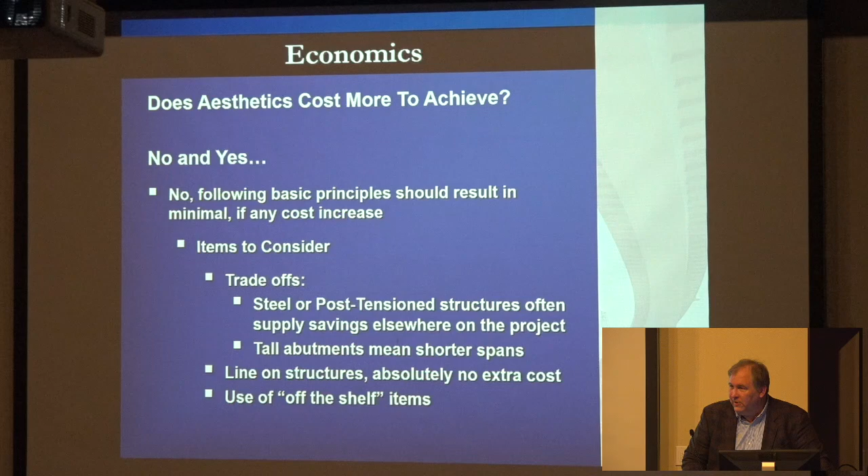One of the difficult items we have as bridge engineers is that we use off-the-shelf items. Our girders are made in Harrisburg, down the road, from a pre-stressed concrete standpoint, but even our steel girders are all manufactured—we bring them out in pieces and parts. It's like building with Legos to some extent, and we only get rectangular Legos; we don't get all the fancy ones. So it can be difficult sometimes to bring those together and use those various pieces and parts to come up with a really satisfying aesthetic quality.

I wanted to take a little time here as we finish up to look at some of McCullough's bridges that are less well known, and maybe encourage folks, if interested, to take a trip out and see them. They're local, not too terribly far away—well, in the state anyway, if in the state's local. Some of these are really pretty spectacular but just don't get much airtime because of their location. This is the Nehalem River Bridge.

This is right at the intersection with Highway 103, going out Highway 26 towards Seaside. You get about two-thirds of the way there from Portland, and then this highway takes off to the north—you can go on this up to Astoria. But right at that intersection between those two highways, you'll find this arch bridge, which I think is actually one of the most well-sited of these single arch, deck arch structures. It's got great height, and it's wonderful in its setting—one of the most fantastic structures he did.

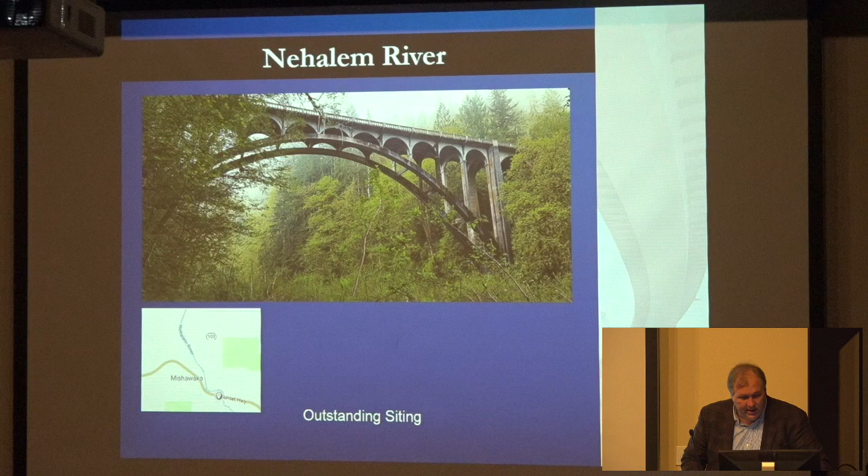Dry Creek, or Dry Canyon Bridge—this is near Mosier. I was told at one time this was the very first bridge that McCullough ever designed for the State Highway Department. It does date into the twenties, and it's certainly one of his early ones. Whether it's the very first or not, it's certainly amongst the very first he did. This has recently been rehabilitated by the Highway Department—this is an older photograph showing a lot of chunks missing off of it. That's all been repaired now; really a wonderful little bridge.

This is on the Rowena Loops, up above Highway 84, between Mosier and Rowena, which is a wild piece of highway if you ever want to drive something—take your sports car with you, I guess, for that one. But really a lovely little structure, wonderful in its detail. It has many filigrees and other items on it—the columns, the little spandrel columns, have capitals on top of them, etc.

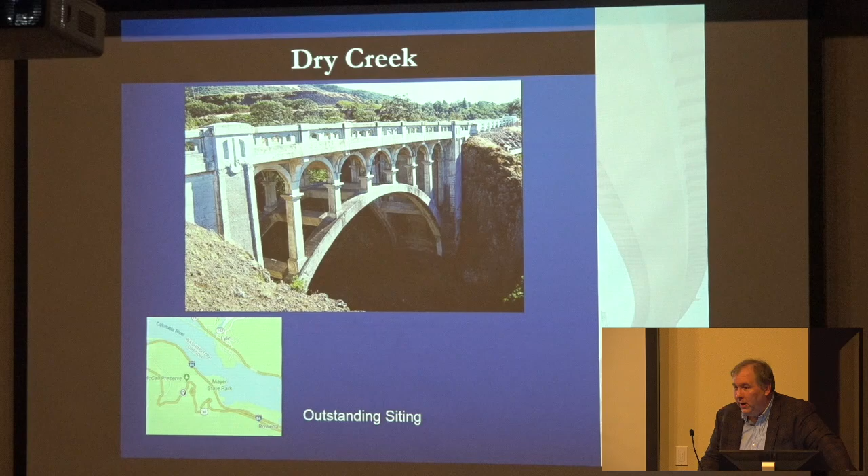One of the interesting things about this bridge structurally is that the arch sits quite low, and we have columns in the center span. One of the things you learn early on when you do these deck arches is you want to make those as solid with the deck as possible. That's really maybe ultimately might even be called an error—or not really an error, but something that makes the analysis a little different. Again, I think it's probably an example of McCullough's ongoing self-education; he continued to learn throughout his career.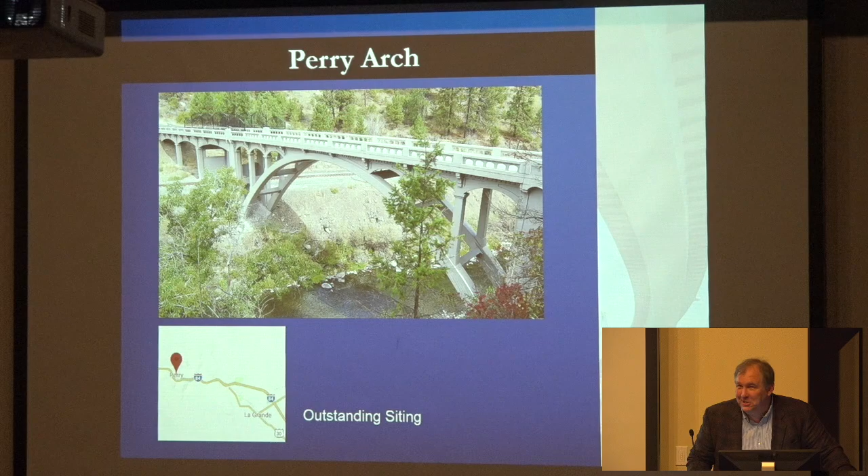Again, one that's, you drive along the freeway and they do have an exit that says go over here, take this exit to see the historic arch. So it's not too hard to find. It's just off the highway.

The Jacob Conser Bridge. If your friends ever come to town, you want to show them a great example of a McCullough Bridge, this is probably the closest one we have here to town that's really easy to see. This is in Jefferson. Jacob Conser was the fellow who ran the ferry at this location on the river before they built the bridge, hence it gets its name.

How he got a ferry across that river right there, I'm not really sure. Seems like you could probably wade across it for the most part, but a lovely piece of three arches run together like that.

A good example of some of these pylons at the bridge ends, some of the architectural elements that McCullough liked to incorporate in a number of his structures. Like I say, very close by. Pretty narrow, but still functioning very nicely to this day.

Outstanding siting.

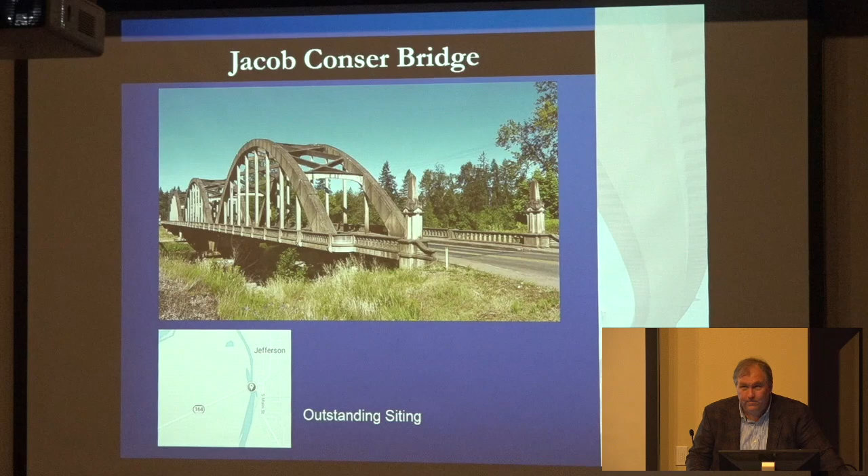Economics. Extra first costs. There are some things like custom form liners that can come into these. Bridge railings anymore, we're not getting much chance to use anything with bridge railings on our structures. You won't see, sadly, much in the way of an attractive bridge railing on structures as the future goes forward. I say sadly, depending on your perspective, I guess, but safety is really taking the front chair on that, and aesthetic bridge railings are really going by the wayside in favor of making sure that they're the safest thing that possibly can be put on these.

Surface treatments, there is staining. We use quite a bit of acid stain on structures, which do a wonderful job. The Depot Street Bridge had quite a bit of acid staining done on it to put some color to it.

Extra long-term costs, aesthetic lighting, those take electricity. Like I say, one of the great things about the LED lighting is it's a very, very low draw in terms of how much energy it takes. So as a result, it's fairly inexpensive compared to what we used to put on bridges. So I do think that's going to continue to go forward.

Actually pretty exciting stuff. The Tillicum Crossing in Portland is programmed to reflect the mood of the river with its lighting, so it kind of reflects the color, the temperature of the river, and the elevation the river's flowing at and whatnot. I have no idea what the code is, what green means or blue or whatnot, but it has been set to that. The one here just north of town at Woodburn, they put LED lighting on at the Woodburn interchange right now, which I think is very nice. It does a nice job.

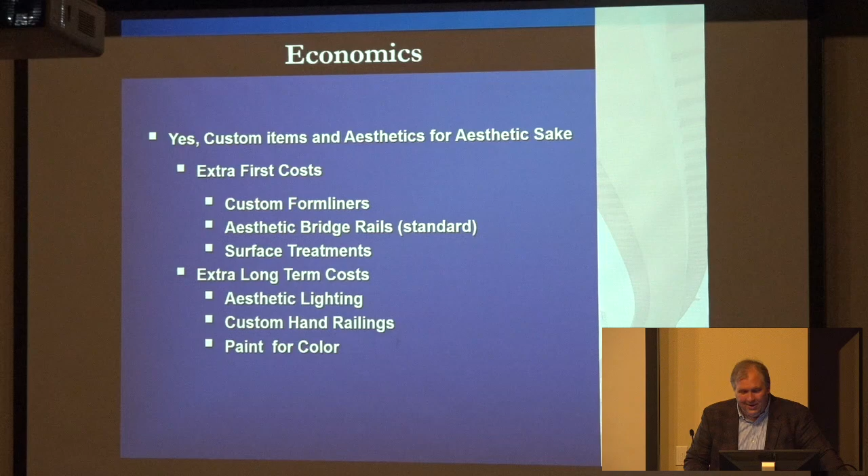So setting environment, field visit, we always encourage trying to do that as much as possible. Form should follow function, but you need to understand the function first. Are we in fact trying to make an aesthetic? Is that part of our function here, an aesthetic achievement?

Line and shadow, I can't emphasize that enough. I think that's really the most important part of any bridge design piece of work. And balance. There are opportunities to unbalance this structure for dramatic effect, but generally speaking, balance is the way to go.

And costs. It can cost more only if it is chosen to. You really should be cognizant of the costs, and we should spend some money. A fellow by the name of Christian Menn, famous bridge engineer, felt that you should always be spending at least 10% of your budget on aesthetic elements.

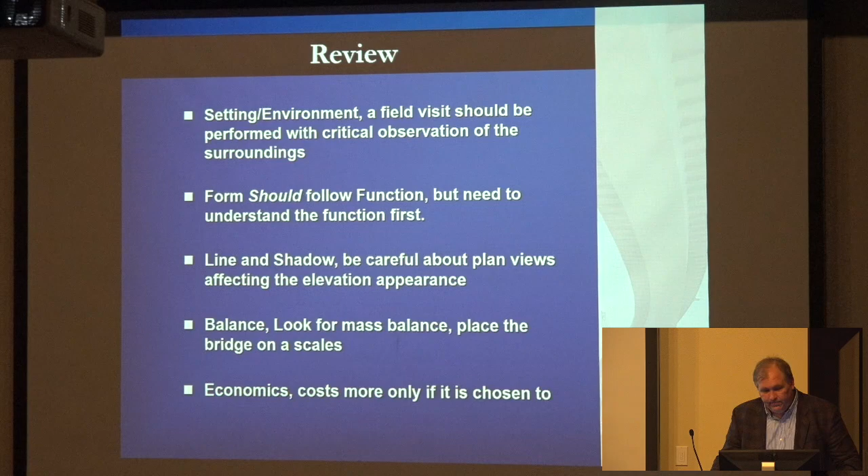My name is Jeanette Flaming. Thank you for this, I do have a question.

When I'm driving over a bridge, I really like to be able to see through the railing down to what's below. It seems like so many bridges now block that, so you can't see at all. That's really significant when you're driving. I went across the bridge at Boulder, or Hoover Dam, whatever it is - when you're on that bridge way up in the air, you don't have any idea where you are.

You don't have any idea that Boulder Dam is down below. It just blocks out everything - you could go past that and not know it. So that view through the railing, I think, is really important to the passengers on the bridge.

There are some options still available to us that we like to look at. There's some steel rail type options, one that we use, and there's actually a concrete one now as well, although it's quite expensive - there's only one bridge in the state I think it's actually been put on. But the steel railing still does give you a view through the rail.